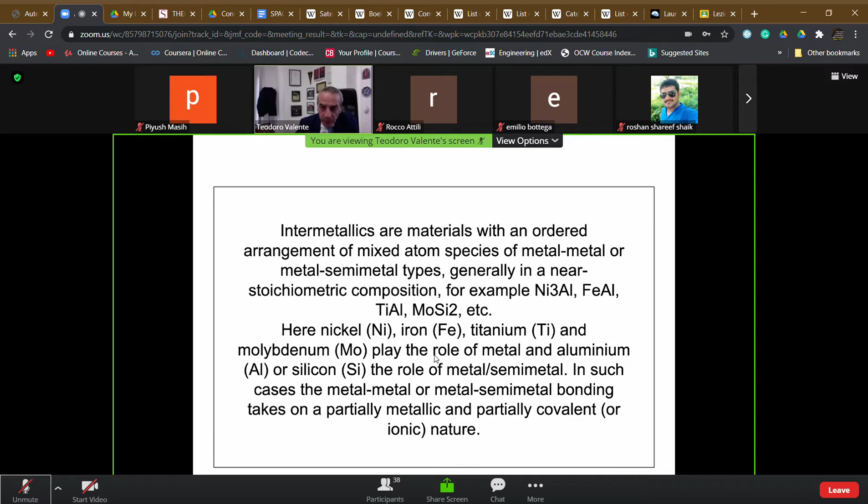We have already seen, let me say, these specific compounds which can be formed inside solid solutions when we talk about binary phase diagrams. And in that case, they are special compounds having bonding properties which are not fully metallic, but they are covalent.

And the existence in these cases of a strong interatomic bonding gives as results, in terms of macroscopic properties of the materials, high elastic moduli of the materials itself, that is, they are to some extent stiffer materials than conventional ones.

Then the presence of, for example, aluminum or silicon can give to the bulk materials the capacity to form a protective surface layer, essentially when we are working in oxidizing environment, thus giving to the material itself a good oxidation and, generally speaking, corrosion resistance.

So, having in mind this general concept, a considerable effort in the years has been reserved to the development of intermetallics as aerospace materials. But there are still some drawbacks, even though some niche applications, as I told you, are still existing. They have a good strength and a good environmental stability.

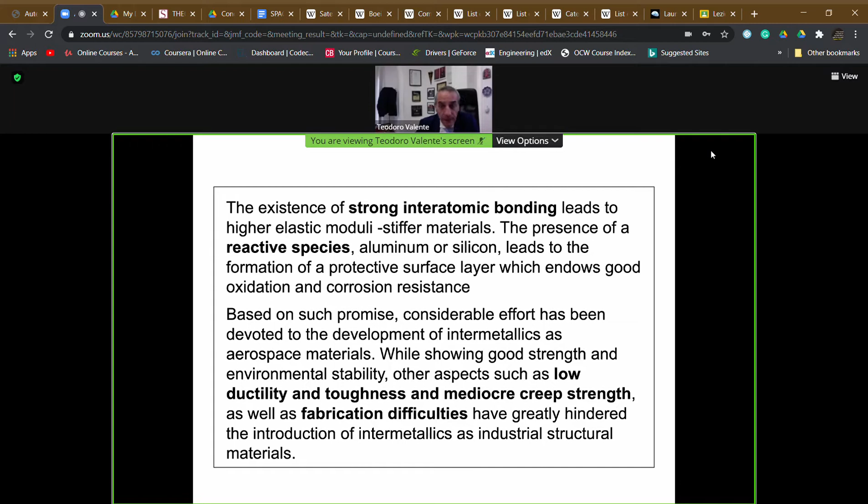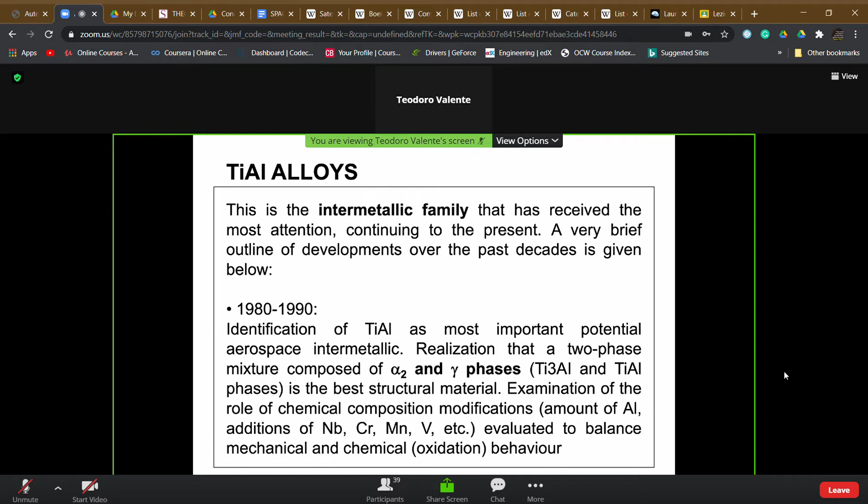In this period, it was understood that it was possible to fabricate, with all the drawbacks, aluminide bulk materials made by one phase called alpha 2 and one phase called gamma phase. The first, alpha 2, made by the stoichiometric ratio between titanium and aluminum 3 to 1, and the second one, the gamma phase, characterized by the stoichiometric ratio 1:1. So this was the first evidence about the possibility to fabricate these materials.

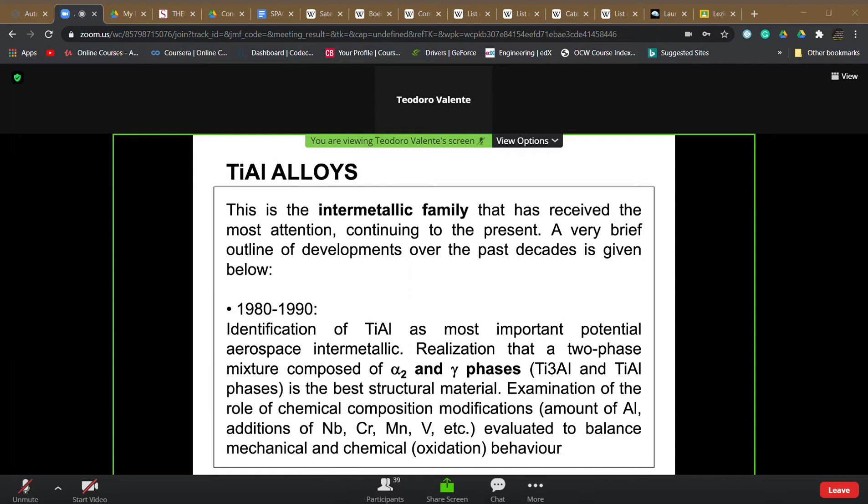So the titanium aluminide. Then after the first experimental evidence, studies began on the role of addition of different elements at low percent values, related to the overall amount of aluminum, for example the addition of manganese or vanadium, in order to balance the obtainable mechanical properties and the expected improvement in the chemical oxidation behavior.

Moving on to the year 95, in this period the first generation alloys were developed, based on the composition 48% with chromium or manganese or other elements I mentioned before, the balance of the composition being obviously titanium, with a reasonable compromise in terms of mechanical properties and oxidation resistance.

And so there is a possibility to use these materials, for the reasons we will see later when we look at a glance at the most important mechanical properties of the bulk material, for the fabrication of turbocharger rotors or valves in automobile engines, or for example, both for the aerial field or the land-based field.

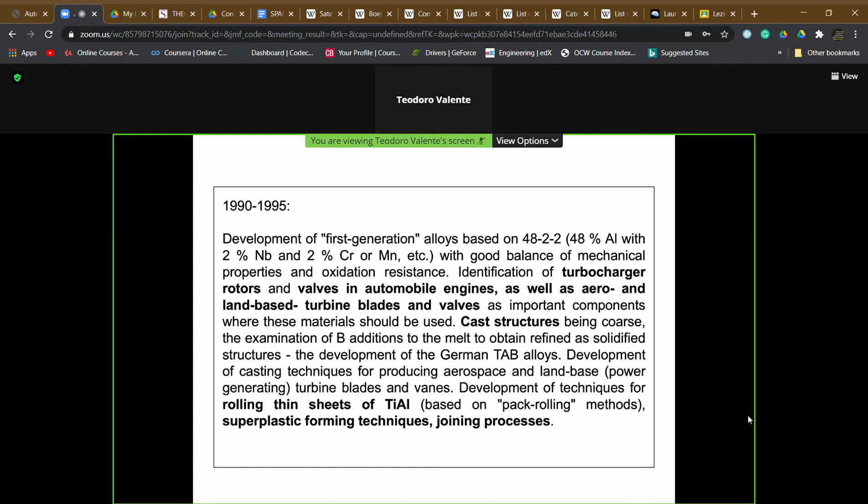Up to the 2000s, the research activities were concentrated on two lines: on the development of very, let me say, specific technologies in order to have contaminant-free production, because these kinds of materials must exhibit controlled composition. Impurities can represent a problem.

Having again in mind additional problems due to the formation of segregation during casting, which can affect material homogeneity. The attention was put also on the development of processing technologies for production of more performing automobile parts, introducing other techniques with respect to the ones I have already cited, like extrusion, or, very important, powder metallurgy-based techniques, on which we will spend some words at the end of this chapter.

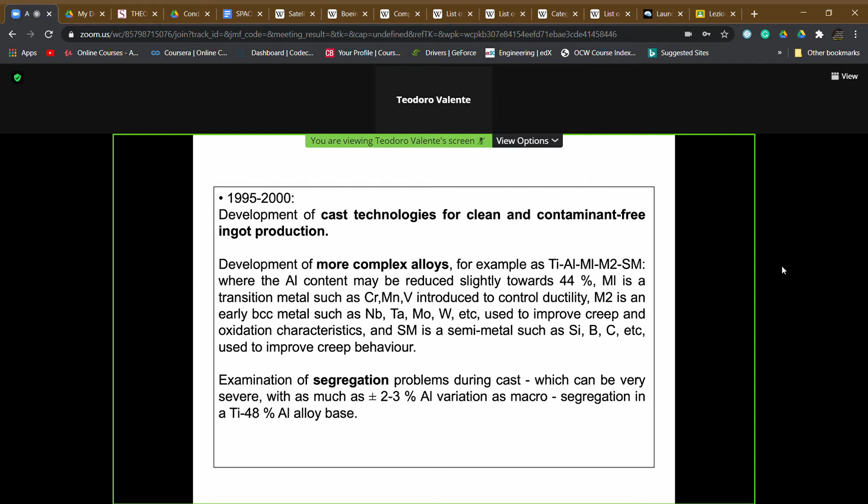We can include also the isostatic pressing techniques. And so the attention was put on casting, powder metallurgy, extrusion, forging for the preparation, for example, of turbine blades.

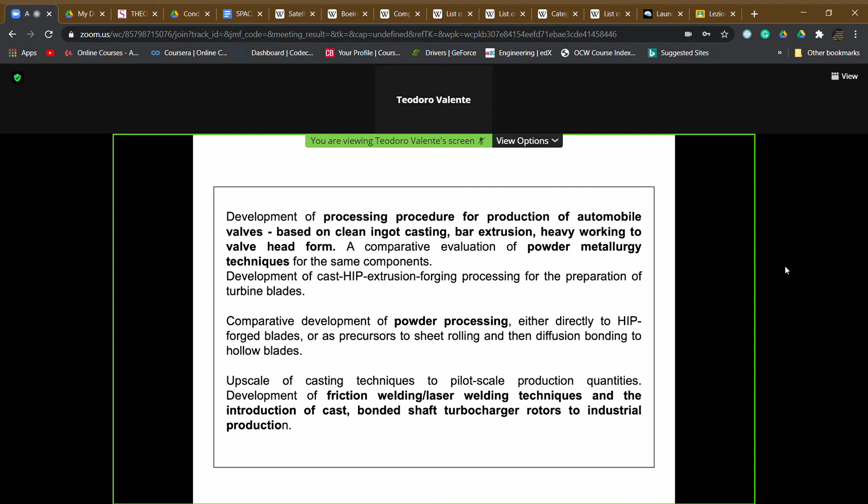during our discussions. Some other variants have been then developed in terms of composition, for example, by using niobium, and then they have been fabricated, and we will see later on, also high temperature turbine blades, by referring to this class of materials with specific techniques of powder metallurgy based on hot isostatic pressing. Anyway, we should

this titanium aluminide, the most performing is the gamma titanium aluminide, even though we can have a combination of alpha 2 and gamma phase. They are still relatively very young in terms of age of materials, because essentially in a practical way they have been more or less available. Have in mind that each single

based superalloys, we can say that these nickel-based superalloys have been studied and optimized for more than 50 or 60 years in production by titanium aluminides and gamma phase. They still are, as I said, young, and so they still need, for a widespread potential application, further optimization work which must be done.

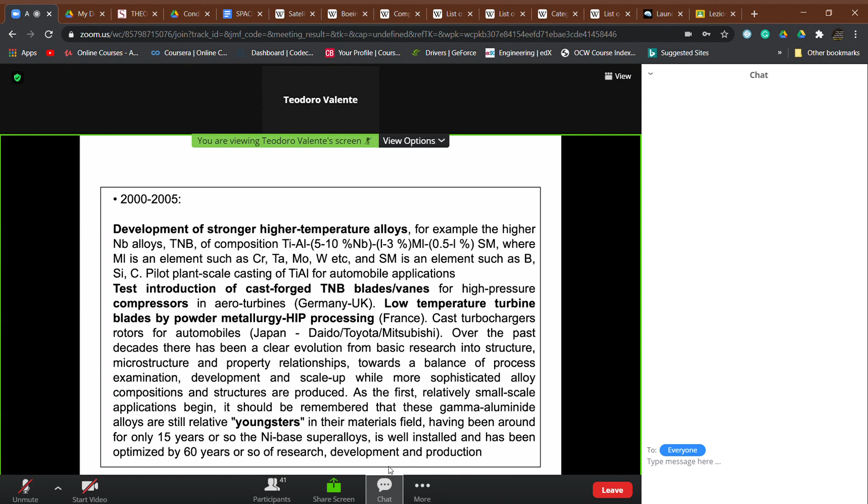If we are talking about creep resistance, or if we are talking about oxidation resistance, because see again the gamma phase titanium aluminum, we can expect something which is around 900. That's true, but it is sensibly higher than titanium alloys. And if you remember, when we had the possibility some years ago to discuss about the titanium alloys, we said, well, titanium alloys are pretty interesting metallic alloys because they are light, 4.5 grams per cubic centimeter. So they are lighter than steels, for example. And so they can, in principle, just looking to these numbers, be proposed for high temperature applications.

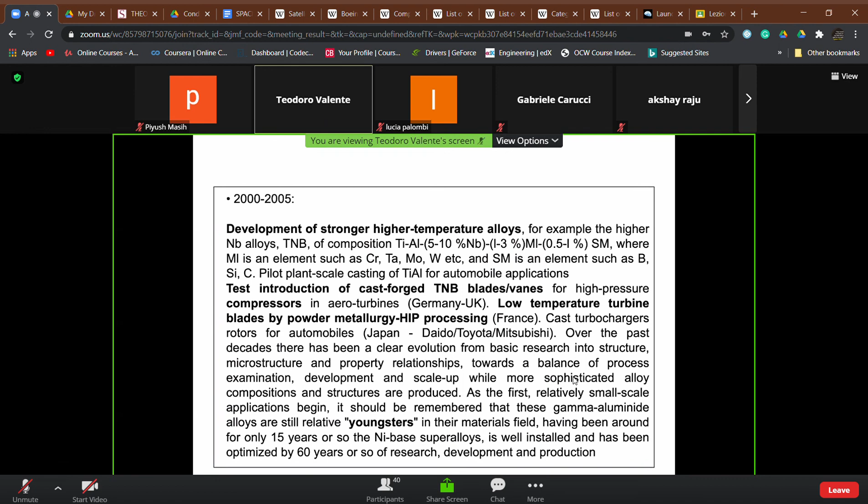But at that time, we said that this is true, and apart from the possibility to have a beta transus that depends on the alloy composition, the maximum working temperature of titanium alloys is limited, we said, to values which are around 600 Celsius. And this was essentially and primarily due to the very low resistance to oxidation, with an active mechanism of high temperature corrosion. But if we move to gamma titanium aluminides, we can achieve 900 Celsius. So it's more or less 300 Celsius more than titanium alloys.

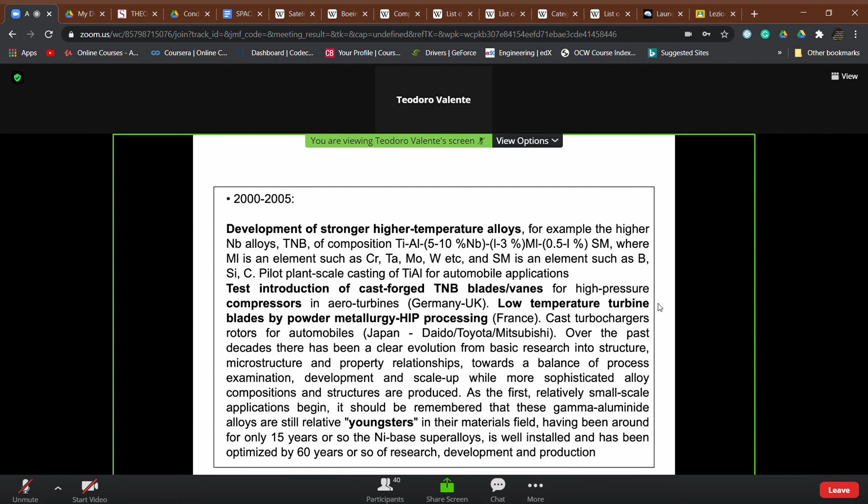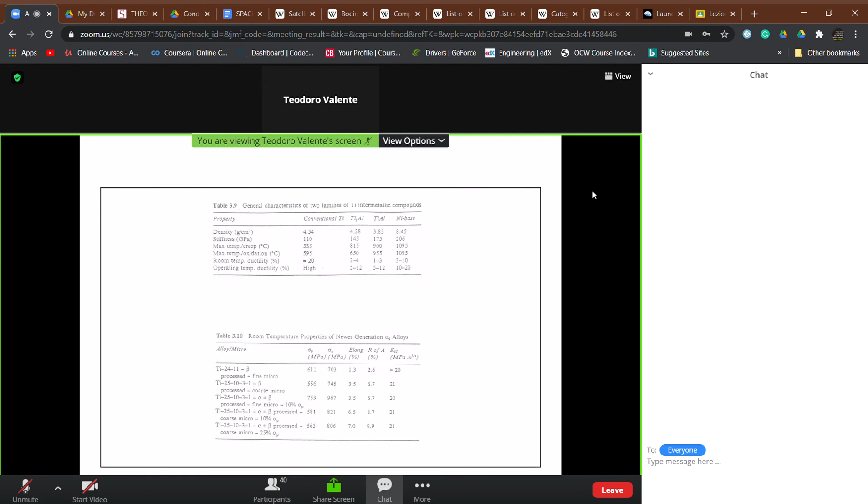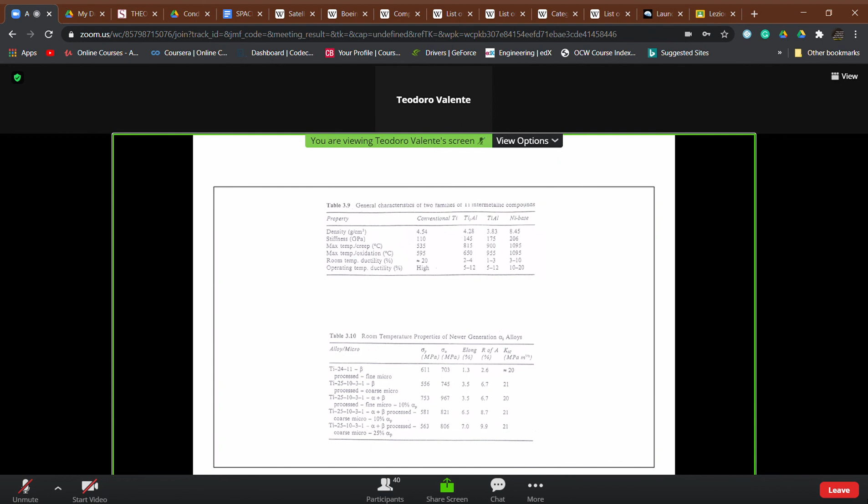And so if we look to these figures, what we could say is that for turbine blades, not only limiting, as it happens for conventional titanium alloys, to compressor blades. Obviously, we cannot propose to use these materials for first-stage blades of a turbine, where we still need the high temperature resistance of 1100 Celsius, but they can be offered in the intermediate pressure stage or in the low pressure stage of an aero engine. So the, let me say, drawbacks which must be managed in terms of technological processes, which are related, as you see, to